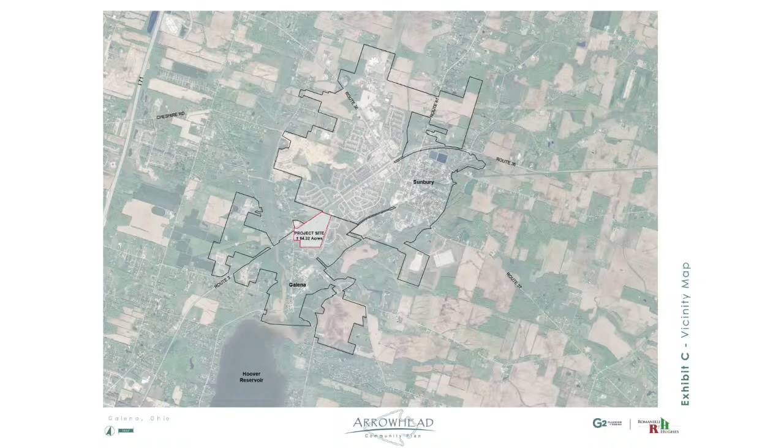So this is the Arrowhead Golf Course. I think everybody's pretty familiar with where it is at this point. It's right up on the northern edge, adjacent to Sunbury, right up against State Route 3. The property itself right now is the existing golf course, being used as a golf course. Mr. Grosinger is looking to sell the property and retire, ultimately not run the facility as a golf course anymore.

The site currently in the village's comprehensive plan is labeled as to be used for planned commercial, and I believe it is in the zoning map as planned commercial. What we are intending is, instead of what we think is a more intense use of larger commercial buildings on this property, we want to do more of a village scale mixed use with residential, a smaller portion of commercial, and a variety of residential, all focused really around a community green.

The property itself is about 84 acres. There's a variety of ponds on the golf course now; those ponds are actually more hazard than drainage, and they're also used to feed the irrigation system for the golf course. So a lot of what you see on the golf course is going to be reshaped for the development. But we have an existing power line - you can kind of see it in the image there to the south. And then up in the northeastern corner, we have a stand of existing trees that we've arranged the development to try to preserve a majority of in that location.

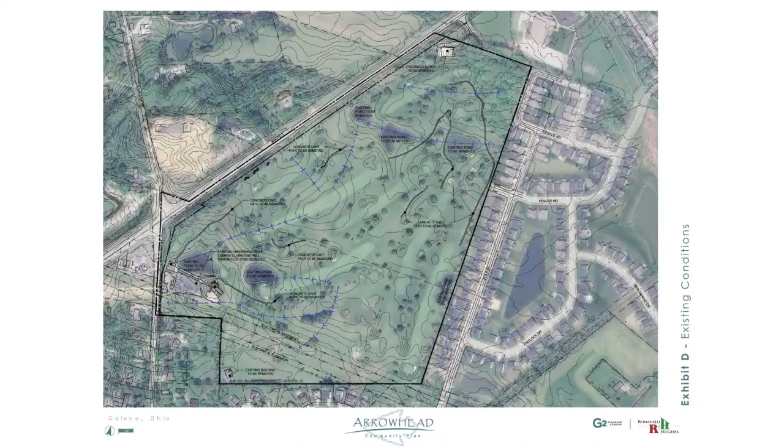So this is an overall view of the development plan. This is black and white - it's going to be very difficult, and I apologize, for people to read on that small screen. But this is really a mix of uses, broken down into, I think, 4 or 5 sub-areas in terms of use. Right up along Walnut, at the corner of Walnut and State Route 3, is the commercial area. And then the next sub-area, adjacent to the commercial area along State Route 3, is...

I do have a pointer. I wasn't sure if it would actually work - I don't think it'll work on a TV screen. Fantastic.

It's the same exact pointer that I have in my pocket. Yeah, it will not work on the screen.

So that's the commercial space that she's pointing at there. And then we have for-sale townhomes. These are not going to be rental; they're going to be sold as fee simple to individual buyers.

And then we have a traditional single family section, primarily across the northern portion of it. These are single family lots, typical single family homes, very similar to what we have next door. And then down towards the southeast, these are patio homes.

Patio homes are designed for kind of a 55-plus community. They're single story, no stairs. It's a very quiet community. These are folks that don't have kids and don't need a lot of outdoor space.

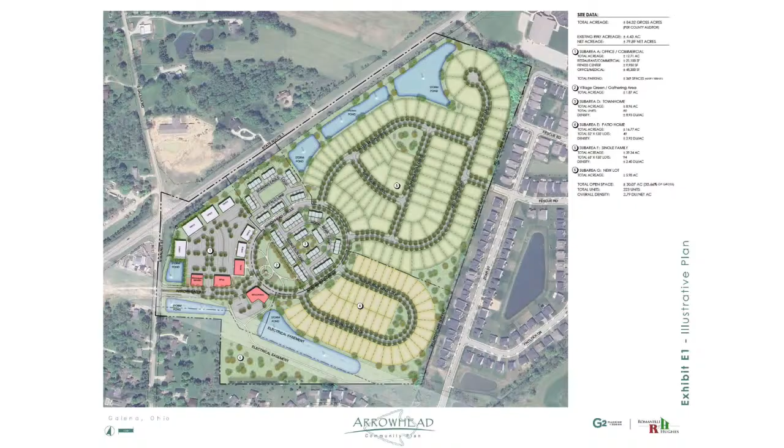This is a look at the open space plan, just a bit more clear. We have a variety of different open spaces in the development: some are perimeter open spaces, some are landscape buffer strips, some are smaller individual community parks inside the different sub areas, and then we have the main community green, the 2-acre community green in the center.

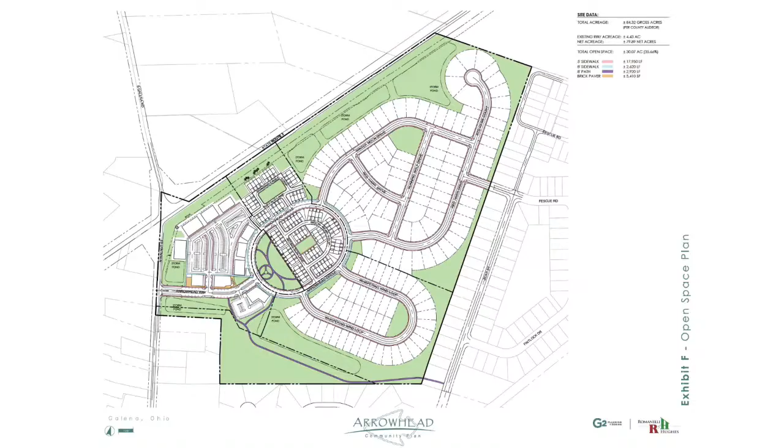That community green is really going to be the focus for the entire community. It's the first thing you see as you drive into the main entry and hit that loop. It's going to be the thing that everything focuses on, so the townhomes are designed to front on that space. That whole space will be defined by architecture, much like you'd have in a village, where a lot of your shops along the road face out onto that village green.

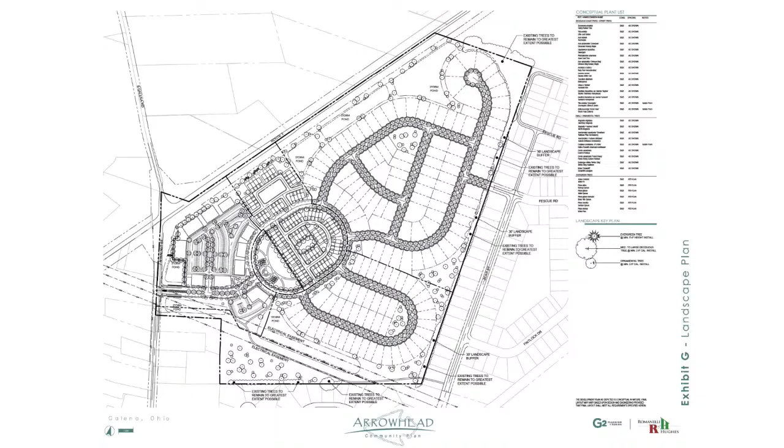So landscaping, this is just a diagram of the landscaping. Obviously, with a development like this and with Romanelli and Hughes, this is going to be extremely well landscaped. You can expect street trees throughout the development on all of the streets, including the areas where we have on-street parking. We'll have landscaping in the open spaces, all of the individual units will have their own landscape packages offered with the units, the commercial area will be well landscaped as well, and the center green, you'll see some examples of that here.

This is an enlargement of the entry. The entry will be flanked by 2 ponds. One restriction we have is the overhead power line runs right over where our entry comes into the development, and they get a little touchy about planting trees under their power lines, so we won't be able to put tall trees in that area. We're going to work with them to identify what we can and can't do. Right now we have low signage in that area, but we still need to confirm some of these things with the utility company. We will have ponds on either side with stormwater fountains.

That'll be part of the main experience as you enter the project and enter into the commercial areas. There's also an opportunity for patios—if you had a restaurant there, it would be a chance for a patio adjacent to that pond, to be able to look out on the fountain.

The green space itself is approximately 2 acres. We're looking at a number of potential amenities, but right now we're thinking of it as a community gathering space. Throughout the path network there are benches along all the paths, we've got landscaping, and we've got a gazebo there that can act for community events—it can also be a backdrop for something like a movie night. That gazebo will have power so you can have equipment there and do community events.

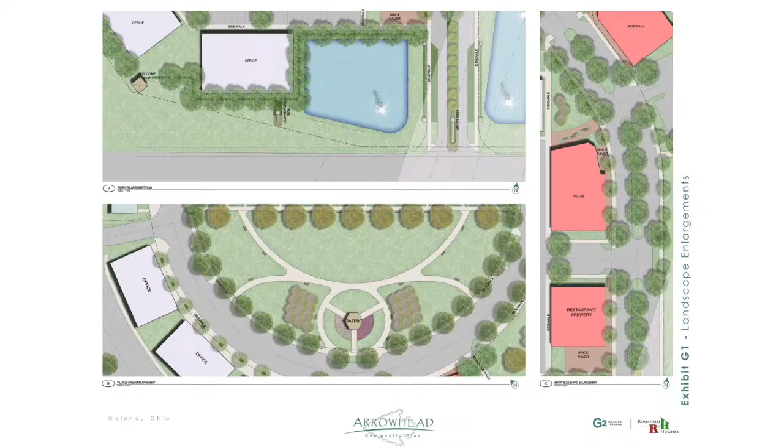On the right-hand side of that page is an enlargement of the commercial frontage. When we talk about village-oriented commercial, if folks have been to Market Square in New Albany, the storefronts actually face the road and address the road, so you have front doors along the road instead of being buried by parking. We want to create a very pedestrian-oriented atmosphere—we want people to walk along the street and take advantage of the shops, walking from the development to the shops. If you drive there, we do provide parking in the back, but you're still going to enter primarily from the fronts of those stores.

Just some examples of the landscape details—benches, trash cans, normally what you would find in a public sphere. The individual sub areas for the residential will be required to have gang mailboxes, or what we call cluster mailboxes nowadays. The post office several years ago basically said they're no longer going to deliver to individual mailboxes. So every community, whether single family, multifamily, or townhomes, whether you're on 1 acre lots or quarter acre lots, you have to provide a gang mailbox somewhere in your community that you'll have to drive to in order to get your mail.

You will no longer be able to get your mail at your address for new communities, so we'll have gang mailboxes. There'll be decorative mailbox units with an overhead structure to keep you out of rain, and a nice sloped cap so you don't leave your coffee cup on top and let trash collect and accumulate.

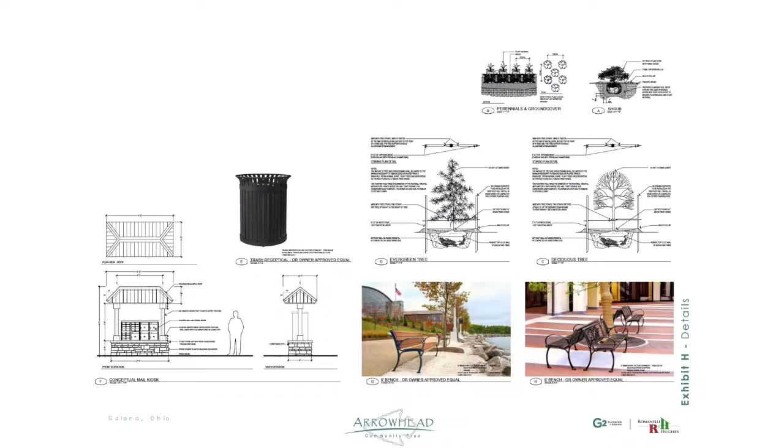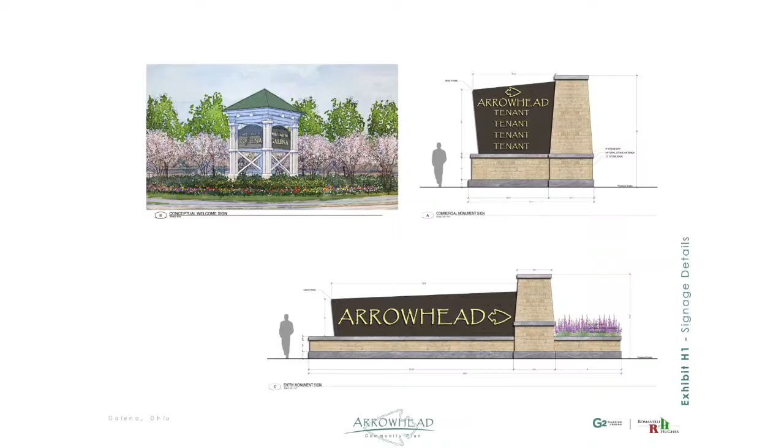And then signage along the road. The other thing we're doing as part of the development is creating an easement area at either corner for the opportunity for a Welcome to Galena sign as an identity or brand for the village of Galena. This will go along Route 3, similar in style to what's on the upper left. We talked to Galena about this early in the process, and they expressed a desire for it, so we're creating an opportunity for some branding there. The other two signs are the main entry sign and an opportunity for commercial signs along Walnut Street.

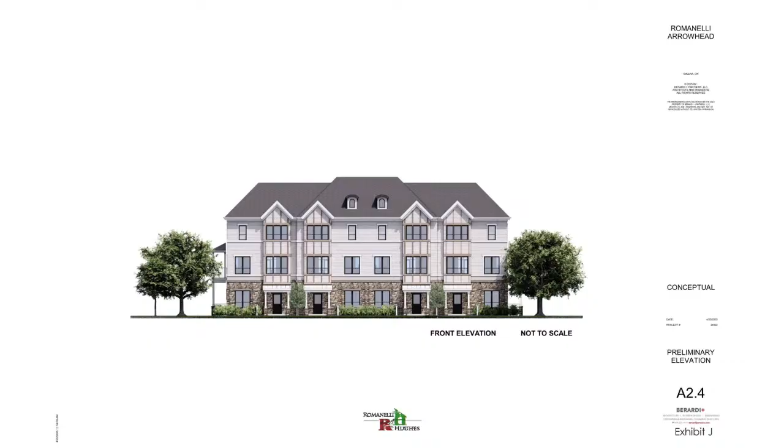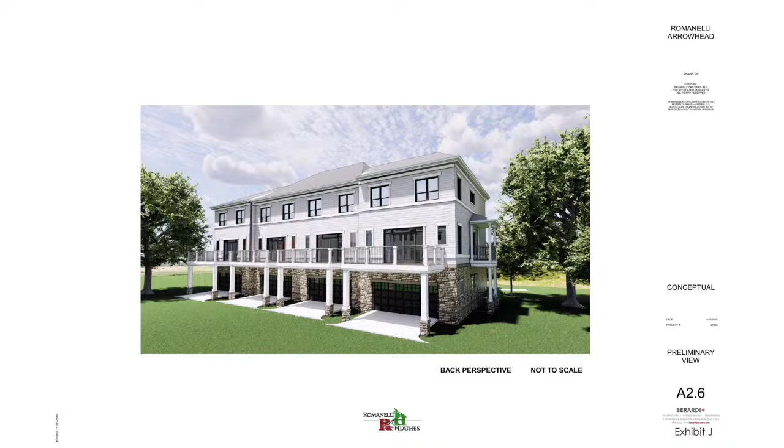This is an elevation of the townhome units, the front elevation. What we don't want with the townhomes is garages that front the street. We want the architecture to take precedence along the street, with front doors out front as the primary feature, and driveways and garages behind the unit so you don't see the car functions of the townhome. The front doors face the street, and the back has the garage doors. In the way we've designed the building, we've incorporated the garages underneath, so you don't get those ugly projections off the back that look stuck on. The garage is actually incorporated into the architecture.

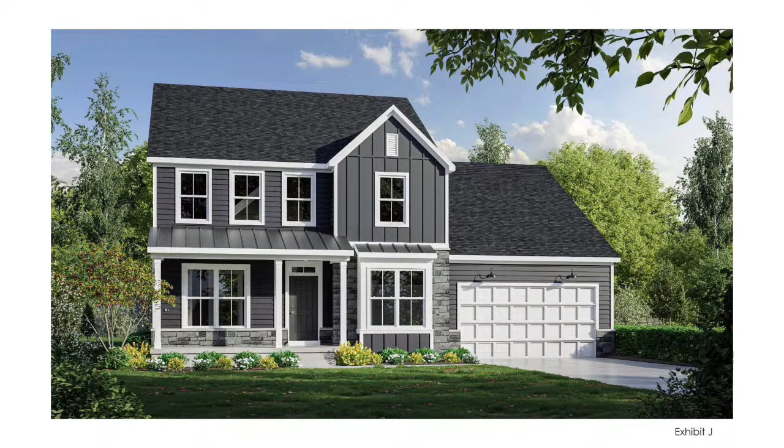These are examples of the single family homes and the architectural style and quality, very similar in nature to a lot of the homes you'll find in the region next door. We're really trying to maintain that level of quality.

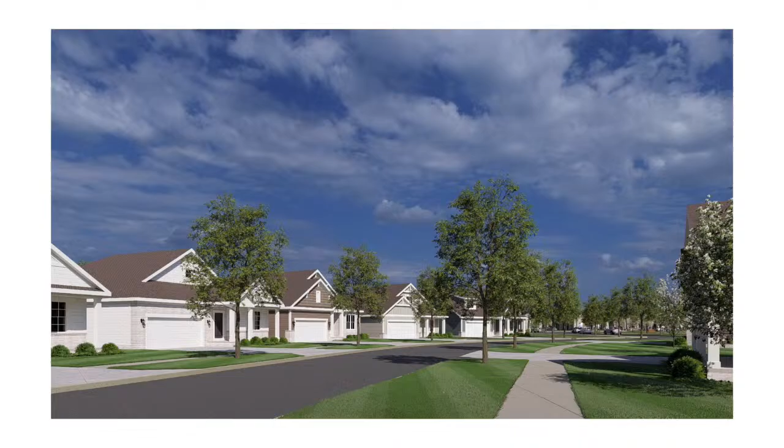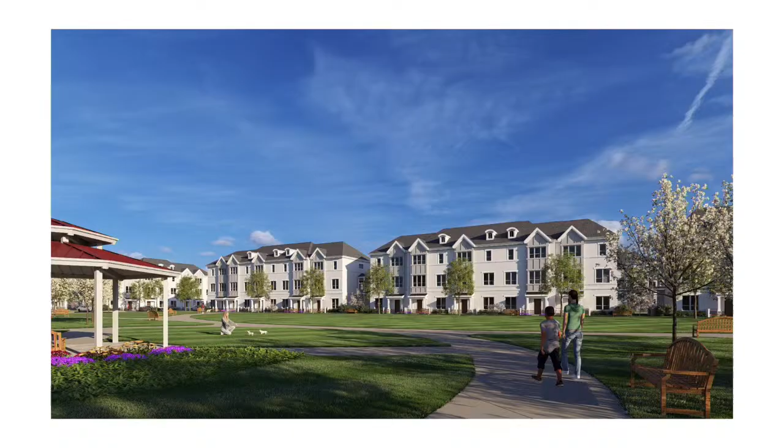Here are some examples of what the streetscape will ultimately look like from a 3D perspective. This is a look through the park, through the community gathering area, and here's a look with the park on one side and the commercial on the other, so you can get an idea of how you might walk along the commercial spaces with the park opposite, or walk into the park from the commercial spaces if you wanted to sit or there was activity going on.

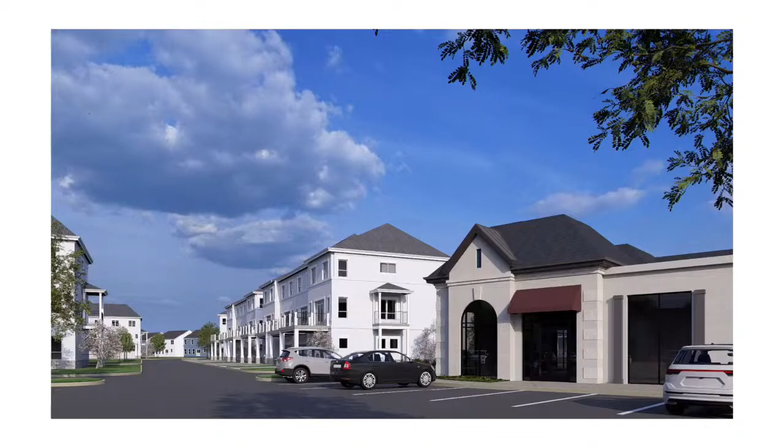Again, more commercial, the townhomes, and a shot of the rear of the townhomes, the townhome open space area.

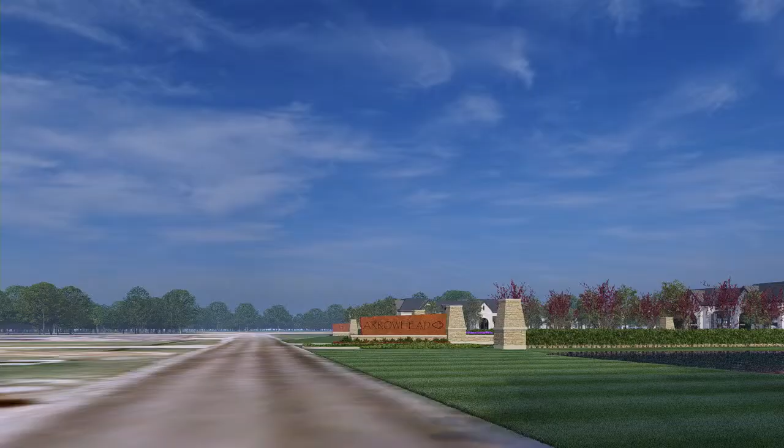And then we put together a couple of videos. This first one will drive you through, starting at Walnut Street, and take you through the community.